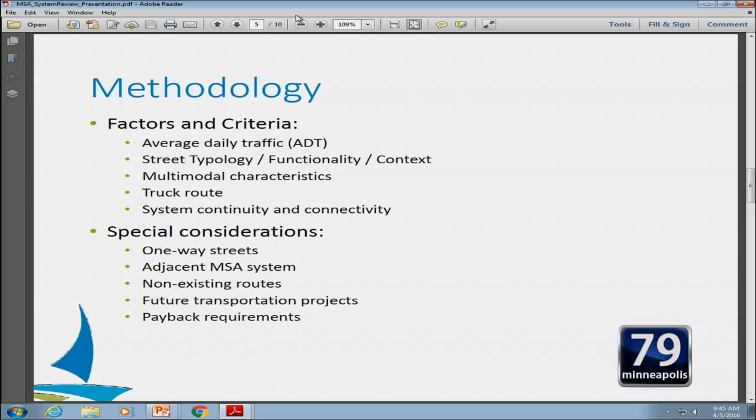Other special considerations taken into account were one-way streets, the adjacent MSA systems of adjacent cities such as St. Louis Park, Robbinsdale, and St. Anthony, non-existing routes currently on our state aid system, and future transportation projects.

Additionally, payback requirements were considered, such that if we have used MSA funds recently on an MSA project, we were not required to incur additional funds to remove it from our state aid system—because removing something we'd recently used funds on would incur a cost. So we wanted to take that into consideration as well.

So I color-coded what the assessment entailed. It's more along the lines of a four-tiered system: is there very good alignment with our current method, the factors and criteria laid forth, good alignment, fair alignment, or poor alignment.

What this took into consideration, as previously mentioned, was primarily the average daily traffic volumes, the functionality of the street, referred to as street typology, the location within the city, and the connectivity to other routes, making sure all the termini of the streets were extended to the nearest adjacent system.

So making sure we align, we really want to tie this to the existing functionality of our street system. Access Minneapolis defines a number of street typologies, and I color-coded these to tie in with how well they align with our system, tying the functionality of the street towards our recommendations, making sure that anything on the state aid system aligns with the functionality and characteristics of a state aid street, such that our commuter, commerce, activity, and community connector streets that serve higher purposes are very strong candidates to remain on the system, or if they're not on the system, let's look to get them on.

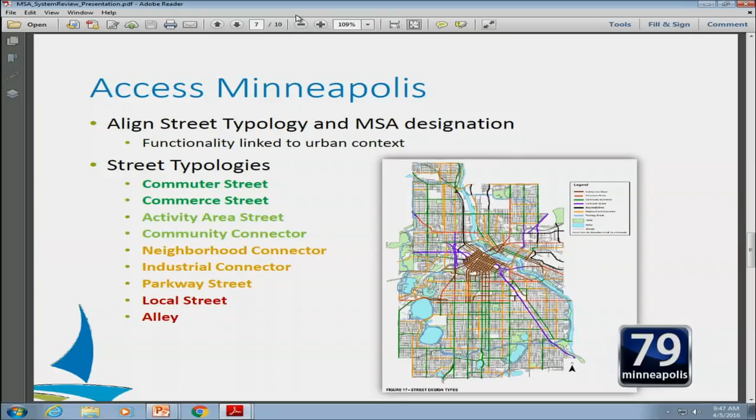And then when you see the orange to red routes, those are more of the routes that don't serve a great functionality of serving traffic or connecting major points of interest. Those were either, if they were on the state system, looked to be removed so that we could come up with a number of recommendations.

So as far as the recommendations we brought forth, we looked at a number of factors and criteria. One of the main points I want to bring forth is, out of the 206 miles of municipal state aid system routes we have, roughly about 85% of those routes are already aligning with a lot of the factors and criteria mentioned. So it left a very small subset of routes that were looked at for removals from the current system.

So what we want to do is set up a framework to implement these changes over 5 years, as I had mentioned. So today we brought forth our near-term recommendations, which is approximately 3.5 miles coming off and going on. So there's an equal swap.

And in order, when we bring forth these recommendations, we have a cap of 20% of our system, as I mentioned, which is 206 miles. So we had to balance both the additions to and removals from the system.

So what we wanted to focus on today, or on our initial near-term recommendations, is with our additions, we want to add routes that already are serving and providing mobility for higher ADTs and align with the factors and criteria such that they serve a higher functionality, and then remove routes that have lower traffic volumes and aren't serving the higher uses as defined by this analysis.

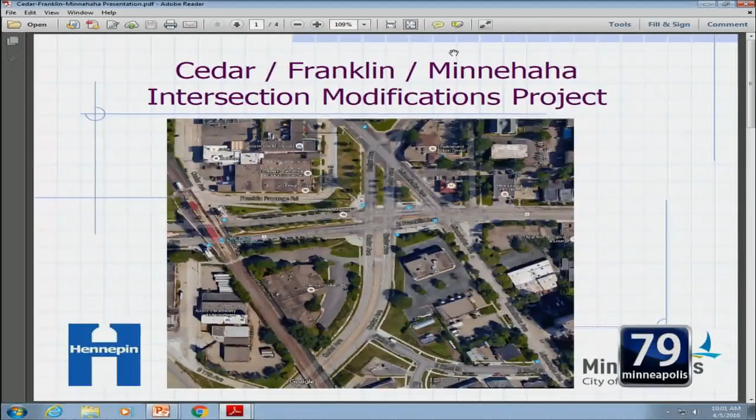A couple of years ago, the Pedestrian Advisory Committee brought this forward as a priority. It's been a priority for the bike group as well. From the vehicle standpoint, it's also been a problem, primarily due to some visibility problems and just a busy area with a lot of traffic trying to go through. So it's confusing to motorists - there are some strange things with nearby highway ramps, but it's not obvious as to what lanes you should be in and how you should get there.

But there's some really good things going on. Some improvements have been done - the county and the city have been working along the Franklin Avenue corridor for a number of years trying to get the bikeways added. To the east of this area, we've got them pretty much all the way to the Mississippi River now along Franklin Avenue.

The city has a project this summer east of Riverside to the river where they're going to convert to what's called a protected bike lane to improve safety even further. The county is also rebuilding the Franklin Avenue Bridge across the Mississippi, and we're adding a protected bikeway system as part of that. So we're working our way down the corridor, and this is one more element from the bike standpoint that goes hand in hand with that.

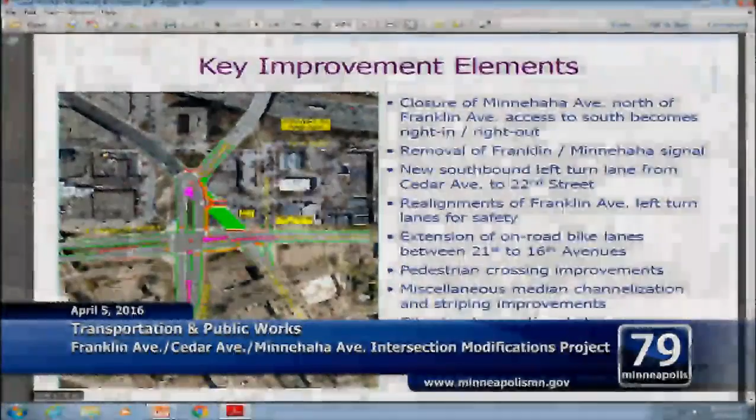So here on 20th Avenue, which right now is one-way northbound, we're talking about modifying that to two-way to allow two-way directions, and the same thing here with 9th Street.

And the reasons behind that is actually to try to mitigate some of what we're doing that's going to affect those local property owners right there in that northeast quadrant.

Taco Bell, for instance—this is a fairly significant change for access to that property. And Resources, Inc., who's just to the north of Taco Bell, is also going to have some impact on how they get to their property.

So by providing a two-way 20th, we thought that would help mitigate that somewhat.

But that pink line in the center there across—I'm going to keep switching here—but across Minnehaha, this is a serious change. It eliminates the ability to turn left off Franklin to go south on Minnehaha, and it also eliminates the ability to come north on Minnehaha and turn left.

So that changes some of these travel patterns and makes some of them more circuitous. They're not major movements today—they're fairly small movements—but nonetheless it will affect some things.

So we had to talk with the fire station because it affects them—their emergency vehicles coming in and out—as well as, like I say, the local property owners.

So I think that pretty much summarizes the elements we're talking about here today. I guess if there are any questions, or Alan, if I missed anything.

Which calls attention to a concern I have, because Augsburg College is right up there, so that's where people will go to get there. It's also the major bike path that gets you into the University of Minnesota campus. It's a significant connection we've built. A lot of bikers and pedestrians getting to Augsburg and the university, or coming from there, want to avoid this horrendous intersection. So they'll take this path and go down to 20th and 9th. The two-way will allow some flexibility there.

But then when you get to Franklin, if you're a pedestrian or a biker, the way it's shown on this, it looks like there's a pink median - it probably won't be pink when it's built, that would be fun though - there's a median there that says bikers and pedestrians shouldn't cross there, we don't want you to cross there. If you're a pedestrian and you get there, it would seem pretty ridiculously far away to get to a light to actually make a crossing. So I'm pretty sure if it was me and a lot of other people, we'd cross there anyway.

There's also 2 lanes of traffic coming in one direction and then 1 lane and a bike path in the other. I also think a lot of bikers will decide they're just going to work their way over or around that too. Have we thought about that? And would there be any way to make it safer and easier for bikes and pedestrians? Well, we also don't want to have cars and trucks using it.

Mr. Chair, Councilmember Gordon, yes, all of those things you mentioned, there's been a lot of discussion, there's a lot of ideas.

I'll quickly mention a couple of things that may help this situation, maybe in the next year or two, depending on how opportunities go. Let's see, starting on 20th, maybe on my little cursor here.

So the city is coming through in a couple years, building a protected bikeway down 20th. It's not known right now how that's going to be configured, but it looks like there might be a possibility of connecting here at this cow path. In other words, we may have an option here of trying to emphasize or facilitate this north-south movement that you're talking about, that people are going to want to go anyways.

There's a redevelopment of the old Blue Nile site that's being discussed. As part of that, we've talked about whether decisions can be made with the city and the property owner to try to leave some ability for us to widen that median, pull the property line down a little bit, widen that median on Franklin to provide a two-stage crossing, refuge island kind of design that would allow this connection from Minnehaha across Franklin up 20th to connect to that protected bikeway.

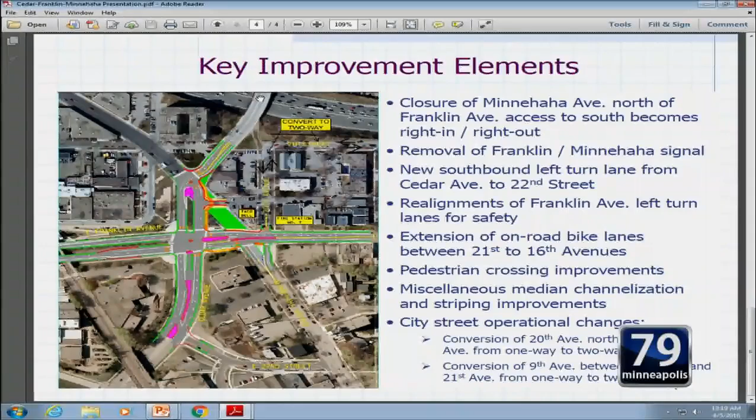I think part of your question also had to do with Taco Bell as an adjoining landowner. We've had numerous conversations — we've actually been to their corporate headquarters and the local franchisee a number of times to keep them abreast of this project and keep them in tune with what's happening. I'll just tell you this: at least at this time, they've expressed no particular desire to be involved with that property or to look at development or anything like that.

We've just kept them in the loop in terms of what's happening and fully understand there'll be continued discussions about the use and function of that property and how it's maintained into the future. In the short term, it will simply be green space like grass, and potentially in the future we'll be able to look at other opportunities.

Correct. One small detail I'll point out: as part of the design plans, that area will remain fully lit and sidewalks that are adjacent will remain in place, so people will still be able to access through there. We're going to change the light pattern a bit so we can get at them and maintain them, but it'll remain a lit area. It just won't be kind of an abandoned piece there.

I think that's very helpful information. I strongly favor this incremental approach. I do think it seems like a little challenging space to have just an open green space in the long term, so hopefully we can continue to work with CPED and others to look for resources to make it something really great for the community, whether that be a more active green space or something that incorporates development.

Yeah, one more comment I'll bring up. At one of our neighborhood meetings we had a brainstorming session, more than a little bit. We had a whiteboard and ideas were listed and recorded, and they span the gamut in terms of uses, activities, or options for there. So we know we're kind of at square one in terms of what those plans might be.

Thank you. Any further questions or comments? Seeing none, again I commend the work we have before us. I think we have a great framework for additional work moving forward, as has been suggested by other council members, and look forward to that work. Hopefully we can keep the partners at the table with their energy and insights. We don't want this big push and then everything to kind of wither away. So let's keep on track with that.

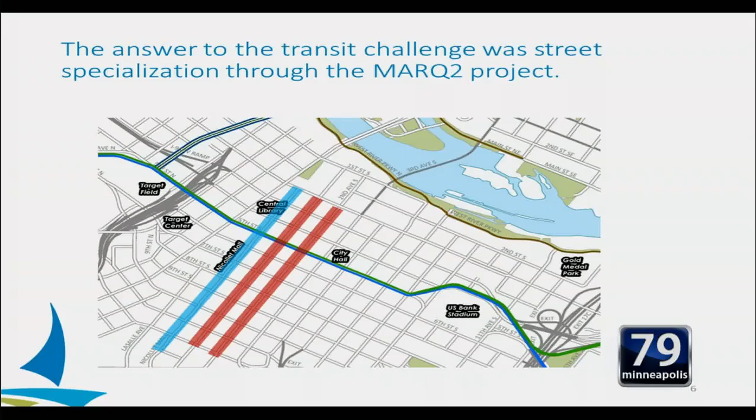And there's good news — that change worked. There were a number of benefits we've already seen, including the fact that local buses are now separated from express buses. That reduces congestion, and on other parallel streets there's been a benefit as well. On Nicollet Mall, we've seen a 40% reduction in bus traffic. That has allowed us to put in place the redesign of Nicollet Mall you'll see this year.

Also, when you concentrate routes downtown, you can provide better amenities at fewer transit shelters at a lower cost — real-time displays, heaters, that kind of thing. Fourth, bus speeds are more predictable and faster, and bus capacity downtown has tripled. Unlike 10 years ago, downtown Minneapolis is now ready for BRT.

Now, there were a few other things that resulted from the change as well. First, because of the concentration of buses on MARQ2, we were able to fulfill what was a long-standing desire from both the city and downtown businesses, and we converted both Hennepin and First Avenues into two-way streets. We also added a bike facility on First Avenue, which, as I'm sure you're aware, is hard to describe as good news. This wasn't something the cycling community or the businesses on the street particularly liked.

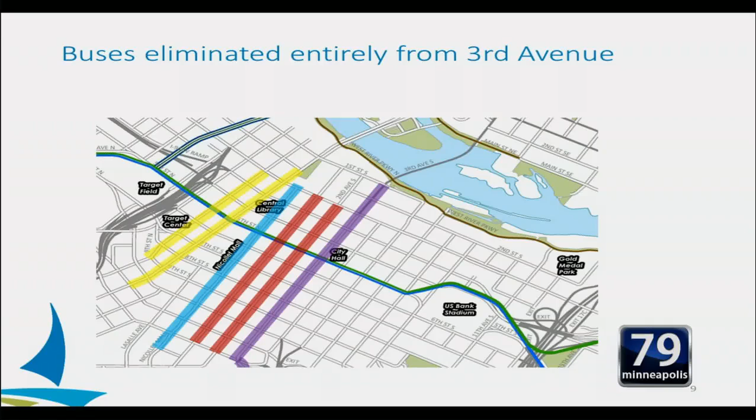But with all the benefit comes a cost, and it has to do with bike lanes. When the design for MARQ2 was adopted, the bicycling community was understandably very unhappy that these bike lanes were removed without identification of an alternative. We've been looking for a replacement to those facilities ever since.

Corridors we looked at included a two-way facility on 3rd Avenue, a two-way facility on Nicollet Mall, and even returning one-way lanes to both Marquette and 2nd. That turned out not to be feasible.

Through the redesign of Nicollet Mall, the city chose not to add dedicated lanes as part of that redesign, rightfully prioritizing pedestrian space on the mall. As part of that process, Mayor Hodges said at the time and since that with that decision comes the requirement that we find an alternative north-south protected route downtown. So she asked Public Works to identify a route and make a recommendation, and that is what you'll see today with the redesign of 3rd Avenue.

So before we get into the redesign of 3rd Avenue, I want to take a moment to talk about how we arrived at that as the preferred route. And in doing that, I'd like to talk about 4th and 5th Avenues for a moment.

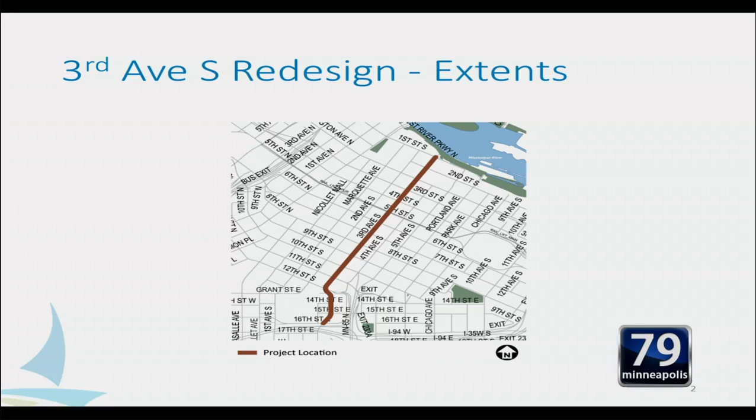The project includes a variety of right-of-way ownership, including MnDOT highway right-of-way, Hennepin County right-of-way, and is primarily a City of Minneapolis designated state aid route. The roadway is generally configured in a 5-lane configuration with alternating blocks of center left turn lanes or a center planted median. A variety of curb uses is also present on the corridor. The roadway was recently reconstructed in 2004 and is in good condition and good pavement condition.

Showing an example of the existing configuration that's out there today. You can see the center green median, two drive lanes. We don't show any of the curb uses on this block, between what I believe is 6th to 7th, but it does show the right-of-way extents and the number of trees located already on the corridor. On the alternating blocks, where it does not have the median, this is replaced with a dedicated left turn lane.

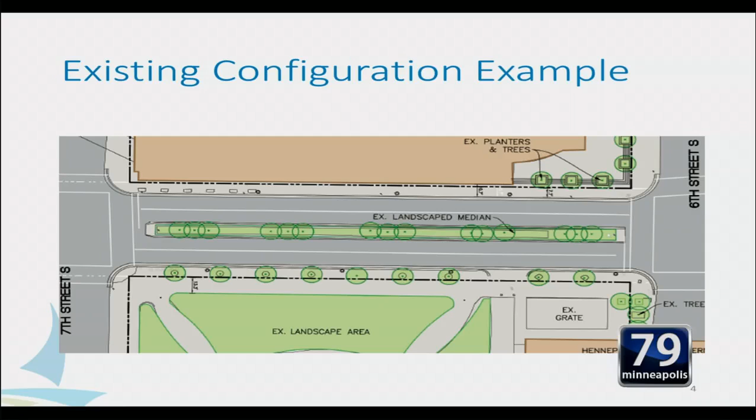The corridor supports a variety of different modal uses. From the 2014 counts of vehicle traffic, it ranges from the mid 6,000s at the convention center to almost 12,000 vehicles per day north of Washington Avenue. It also supports approximately 4,400 pedestrians a day, as well as a relatively high bike count of 850 bikes per day.

The bike facility is identified in the protected bikeway update to the bicycle master plan. The corridor was selected as a primary north-south corridor for bike traffic as part of the coordination of a variety of specialized modal corridors in the transportation system in the downtown core.

As part of the stakeholder engagement, other goals were also identified: to improve pedestrian space by adding greening areas, maintain existing greening space as much as possible, and, as we had more conversation, mitigate and minimize the impacts to vehicle commercial traffic for ingress and egress to the buildings, for deliveries, and a variety of other needs to the properties along the corridor. These were all identified through the engagement process.

The project development, as indicated by the director, started in April 2015 with study and evaluation, initiating a 4-lane configuration. We developed more of an alternatives analysis—what other concerns, what other things can we do, what other options are out there—and adding greening into a 3-lane configuration south of 8th Street, due to the volume considerations of the vehicle traffic along that corridor. We were able to come out with a different configuration that was viable, workable, and addressed a lot of the concerns that had been raised up to that point.

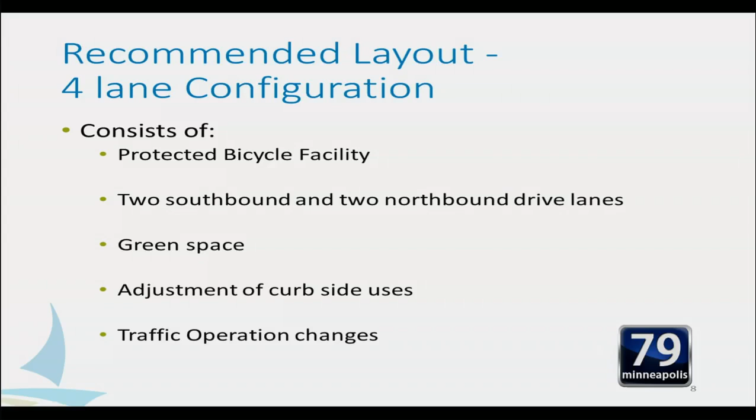We have a few curbside uses that will be adjusted, including removal of parking in locations that are in direct conflict with the bike and travel lanes. We're developing or working with Metro Transit for some new bus stops on 3rd Avenue north of Washington and the existing drop-off bays.

As an example of the operational changes that we're incorporating, we are proposing a signal system that would be upgraded to a video vehicle detection system for the purpose of timing the left turn arrows.

What I'd like to do is walk through the layout in brief. I want to emphasize some of the more contextual elements, how it separates and goes through - generally in 2-block increments that I'm showing here. I'm going to start at the river and head down towards 94.

The first section here I'm showing is the MnDOT right-of-way. We are proposing to remove the parking and adding the buffer bike lanes as is consistent throughout the corridor. We have a couple of additional bus stops, one in front of the federal building, and one in front of the new development, which is adding a bus stop shelter as part of that construction effort.

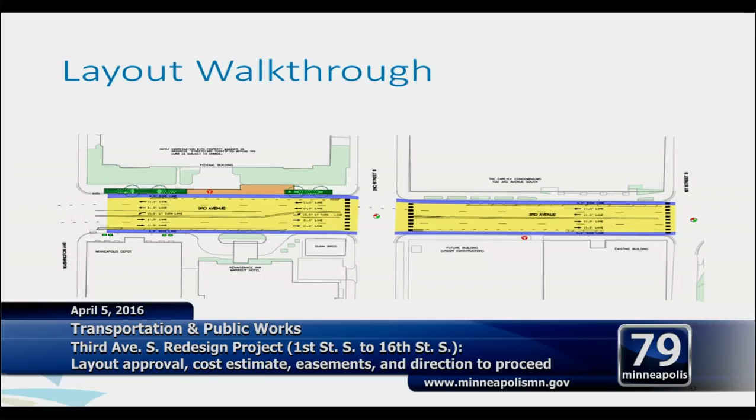Another element I want to quickly point out is what I call zebra striping - you don't see this on a lot of city streets yet. The zebra striping, you see it with MnDOT as well right through here, but they're a bit different, a little wider for the city's portion of it, and definitely frame up that pedestrian corridor through the intersection. This is a new city element. We're working on developing this protocol, so some elements may change, but we're anticipating implementing it on this project.

This is also an interesting portion from an engineering perspective, but also just as a person walking through this corridor - this one has a lot of primary points of access to downtown. You have vehicle traffic on north-south, but also mass transit, and a lot of pedestrians coming through right off of the mass transit, plus high use from City Hall and the Hennepin Government Center. You have a highly developed corridor, US Bank Plaza, which is a good entry point into the Skyway system, and a lot of bikes that use this corridor in this area. So this was a primary evaluation point to make sure we're not bottlenecking the entire corridor and what mitigations we could do to improve it.

We're also working with US Bank Plaza to incorporate some green space. This drop-off bay configuration is still under evaluation and consideration and coordination with that property owner, so it's expected to change. But we're pretty confident that we'll get some green elements to that corridor at that location. We're also showing some green space improvements and a wider pedestrian ramp at the corner of 4th Street South and 3rd Avenue South, next to the City Hall block.

Sixth to 7th, this is pretty much the end of what I'll term the north side of things, where south of this point you start getting lower vehicle traffic and start seeing 10-foot drive lanes. We still have 10.8-foot drive lanes through here. We also worked closely with Hennepin County, and they were able to get some more green space, actual planting space instead of just a grate.

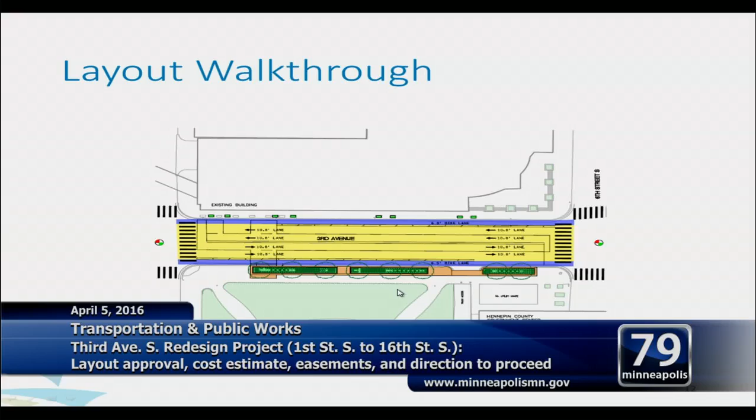As I mentioned, this switches to the 10-foot drive lanes. This is where the volumes of vehicles traveling through the corridor fall below the criteria threshold we see for a multimodal corridor, so we're able to do a 10-foot drive lane. We still have the bike facility.

Did I not move this one? There we go.

Still have the bike facilities, still see the drive lanes coming through the corridor. You don't see a lot of additional green space. A lot of the green space we're able to find is very dependent on maintaining the 8-foot clear zone that we want for the downtown environment. There's a lot of utilities and operations on the corridor, not so much at this location, but utilities are present. There's also areaways and underground parking garages that we're addressing and coordinating with to see where green space is practical.

Question from Councilmember Bender: Thank you, Mr. Chair. Mr. Engelman, before you move on to this next part, could you go back through this northern section and talk about why the original determination was made that 3 lanes are not feasible here? What were the trade-offs with vehicle travel delays, and how did you determine those were unacceptable from a staff perspective?

Thank you for the question. Committee Chair, Councilmember Bender, that's a mouthful — that's a lot of conversation and design detail. We went through a number of analyses. The simplistic answer, without getting into the weeds of design details, is the vehicle traffic volumes. What would happen if you went down to a 3-lane configuration? How would that impact the neighboring cross streets, the intersections for vehicles and pedestrians coming through, and a variety of things? So it's an integrated review to make sure our network stays mobile and workable. Of course, these design details matter a lot to the people using the roadway, so I think these are important points, even though they're rather detailed.

Did you use a level of service determination to identify which intersections were not appropriate for a 3-lane configuration, or were you looking at traffic volumes? Were you looking at minutes of delay? How did this traffic analysis determine that 3 lanes was not appropriate for the northern section?

Director Elwood: Good morning, Mr. Chair, Councilmember Bender. I'm Don Elwood, Director of Transportation Engineering Design for Minneapolis Public Works. You're asking a very good question about the engineering details of delay at intersections, specifically on the corridor of 3rd.

I want to reiterate, Public Works can make both options work — we've stated that earlier. We can make the 3-lane section option work, and we can make the 4-lane section option work. When I say we can make it work, there are trade-offs and mitigation that need to be put in place with both options. We're looking at mitigation with left turn arrows that we'll put in place with vehicle detection, and mitigation at the intersection of 5th and 3rd to make things work better.

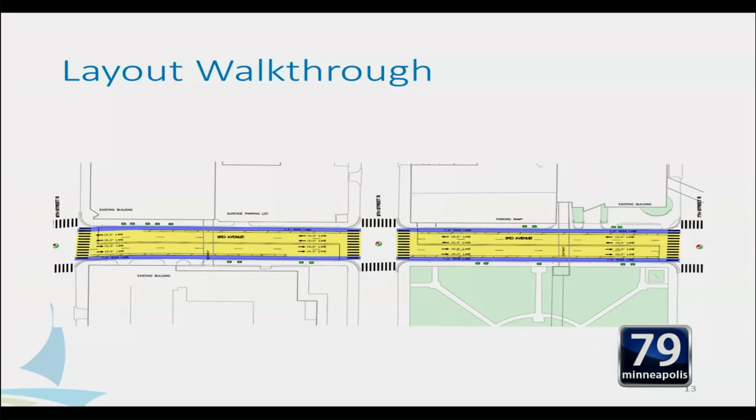This block is pretty straightforward, as are these other ones as well. Some of the benefits are we were able to find some spots on this block that had open utility space, enough space that we could put in a tree or four and have enough root media to substantiate and grow that into the future. We do show a loading bay or drop-off bay at the Ameriprise building as one of the curbside uses that we're intending to maintain.

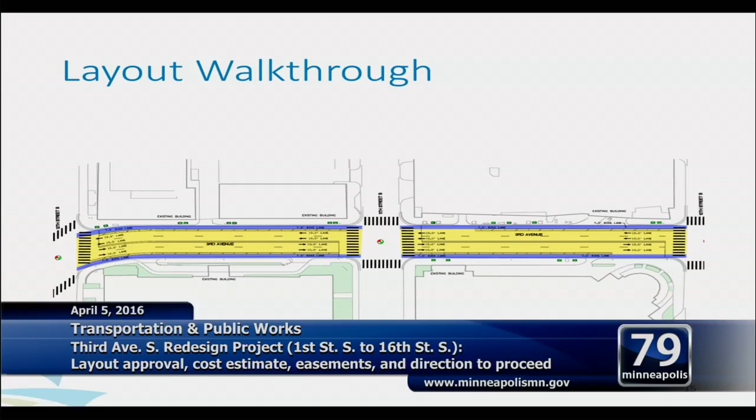The next section, continuing on the south end, we're showing the 4-lane configuration still through. There's not a lot to be added conversation-wise to this section. Then coming around the corner, around the convention center, we're showing 2 lanes to the south and 1 lane to the north.

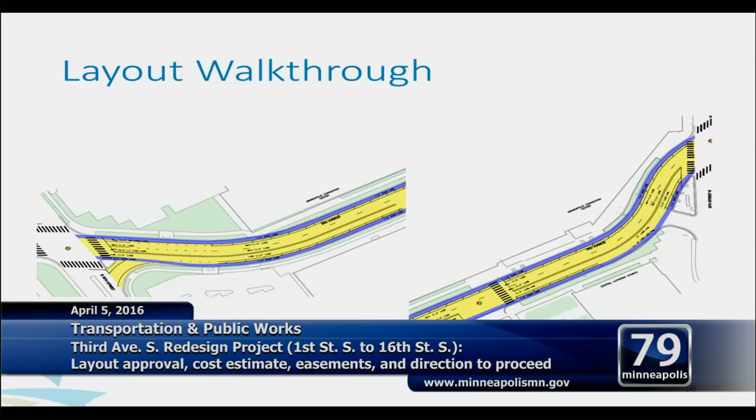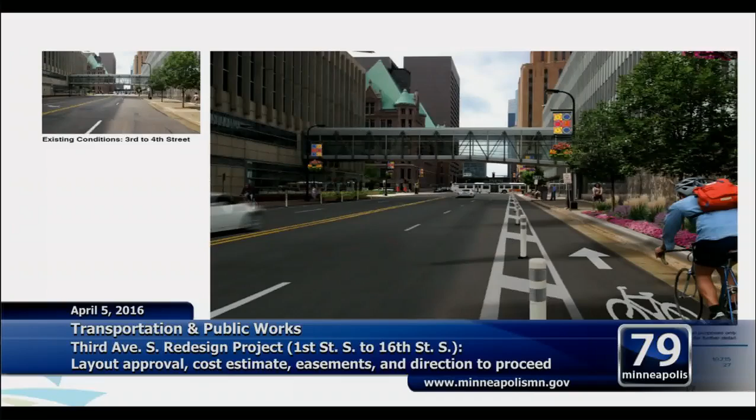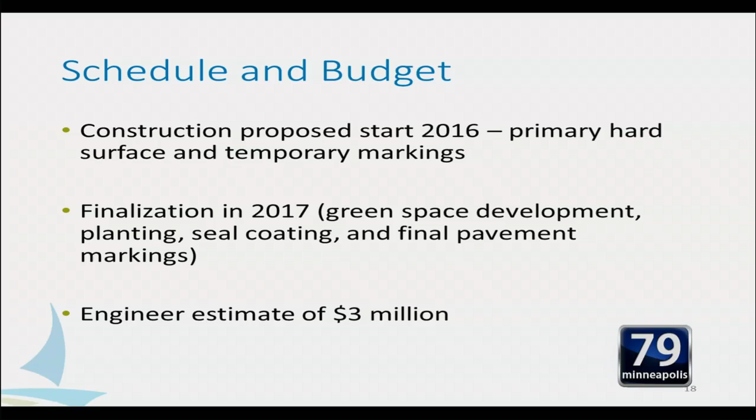The project is on a short timeline. We're wanting to implement this project this year, with a proposed project start in 2016. This would be primarily hard surface pavements, and we want to put in temporary markings to have a bike facility and operating vehicle facility by the end of this year. We anticipate coming back to finalize this project in 2017 due to the coordination and efforts of the plantings, making sure any green space would have an irrigation system as needed. It would also allow us to have seal coating during our more typical July timeframe, and then have the final durable pavement markings placed at the same time.

Our estimate for the project is $3 million.

In summary, we're excited to move forward with this project. It's provided a great addition to the downtown transportation network and improvement to the corridor, hitting on a lot of the points Brandon brought before. This is a necessary north-south connection. We have a lot of bicyclists using the corridor, and we want to get that facility out there for them to work. It augments the multimodal nature of our downtown environment, and working with the DID property owners and property managers to provide additional green space improvements to the pedestrian environment, we'll go further along that path to make it a good central core business corridor. The neighborhood properties and advisory groups and other stakeholders were very helpful in identifying the concerns and elements that would make this project a success. The communication path will be maintained and continued as we move forward, and we'll have to close the loop in communication about this short timeline and engagement. But the engagement has not stopped; we will be continuing to have the conversations. We're excited to see a finished corridor as an example of the mixing of many modal choices that you have from the downtown Minneapolis environment. Thank you for your time.

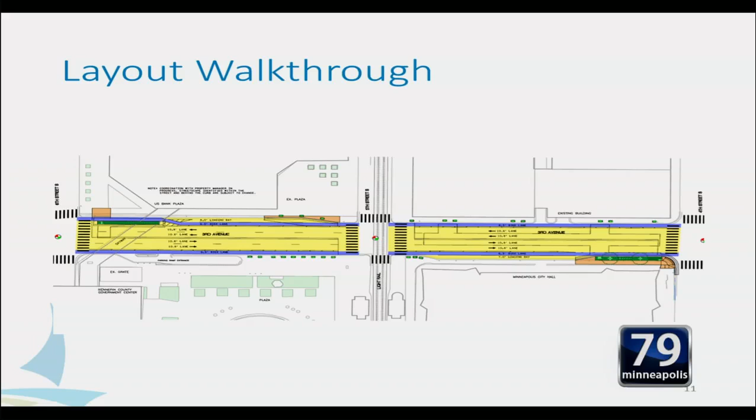The other important aspect of this side of our building is about pedestrian improvements. It's a major thoroughfare, and the Pedestrian Advisory Committee expressed significant concerns about it, which I think is very warranted. Mr. Engelmann, would you say this is improved from a pedestrian standpoint, and can you assure me that while we've reduced the number of vehicles that can be parked here, it's understood that this is still for police as they need to access it?

This is the area of the building you're talking about, just the lower right part of this slide that you have up. Mr. Chair, if perhaps I could answer that.

In the pedestrian advisory resolution, they indicated their concerns with the sidewalk adjacent to us along 3rd between 4th and 5th. We are in total agreement that sidewalk is inadequate on both sides of City Hall and needs to be addressed. This project is not going to resolve that issue, but we will continue to look at providing a better sidewalk environment there.

There's a couple of issues at hand. One is police department operations, so we need to continue working with them to find alternatives to parking. The other issue is this building has what we refer to as an areaway, so the basement extends out under the sidewalk, and the manner in which the streetlights are tied in makes it a complicated situation. Not that it can't be resolved, it just will take more work operationally and from an engineering perspective. There will be some improvements made with this project, but we are not going to resolve the real issue, which is we need to widen the sidewalk along that corridor. Thank you.

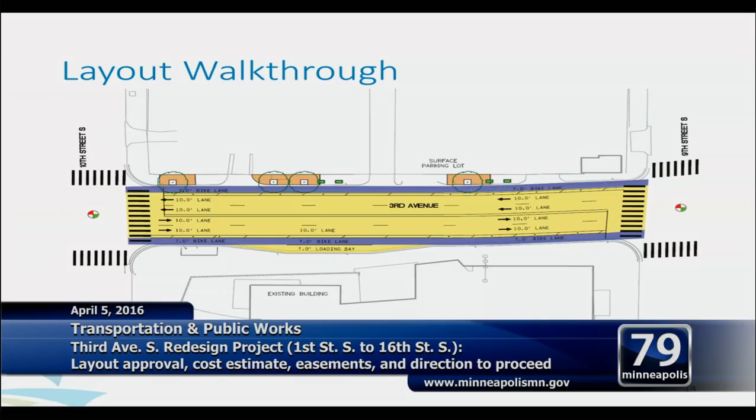And that will not impact the sewer line or cause some kind of huge backup? It sounds like we're not impacting the sewer underneath it. That's the intent, yes. Thank you. That's it.

Councilmember Yang: Thank you, Mr. Chair. I just wanted to point out that I thought I heard you make a motion to forward this item with that recommendation, and then I've heard Councilmember Bender make a motion with regards to what she passed out in front of us. It seems like those two motions are competing, and I'm wondering if we could address one before the other.

We would take the substitute first. My recommendation is to do the motion I made, because it accommodates the time to work out some of these other issues, which are secondary and tertiary components of this project, knowing that in no way is the primary objective in question. So it's more of the issues on the edge.

So with that, I do have several more questions for staff. We didn't get to the southern section, vehicle volumes, service levels, any of that. So I just want to acknowledge that. So you have more questions, okay. Significant. Okay, so Councilmember Glidden, and then Gordon, and then you.

If Councilmember Bender has more questions, I'll let her go, because mine was more in the nature of a comment. We're getting down to the debate between the multiple layouts that have been out there, and I don't know if staff has brought any visual so we can understand the 3-lane design, knowing that staff's recommendation is the 4-lane, which you've presented. So, thank you. Councilmember Gordon?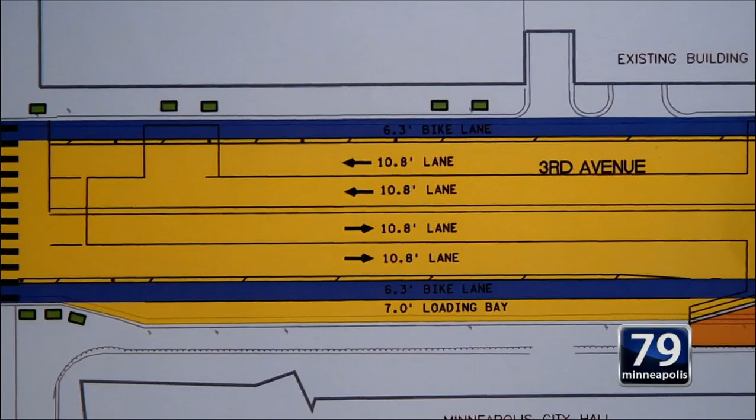Also, I'm interested in having the city lead by example and make sure we have the best pedestrian realm we can around our buildings. If any of us have walked around the building, we know there's a couple of spaces where our sidewalk is very difficult. Over on the 4th Avenue side, it's probably even worse. There's curb cutouts, there's a driveway there, even slanted sidewalks, so it's not a really good alternative. So if you were going to try to walk, the best option would be to come over to the 3rd Avenue side, and I think we have a real opportunity here to improve that pedestrian realm.

So people who are in a wheelchair or handicapped or in a scooter, maybe passing somebody who's dragging along a big suitcase, trying to get up to the station - we want to have a space where they can move comfortably. And I appreciate we're not moving the curbs anywhere. It looks a little bit like we're doing some work with the curb when I look at this and see the brown section and the trees that are added there. So I think it's possible there is some curb work going on.

I appreciate there's some complexity because there's an areaway. I think about cars parking over the areaway, and I think we're trying to move it to have pedestrians walking over the areaway, and bikes, and I don't quite understand all the complexities, but I'm just a council member, not a fully certified engineer who understands how lighting connects to things like that.

So I have a motion that would try to include the layout, constructing the wider unobstructed sidewalks on this full block, continuing the protected bikeway, and removing all the parking, which I think is the resolution I want us to get to. I also think it's a resolution supported by our advisory groups, and I think we heard recently from Mr. Kotke that he supported that resolution. I know there's concerns about the cost and added engineering.

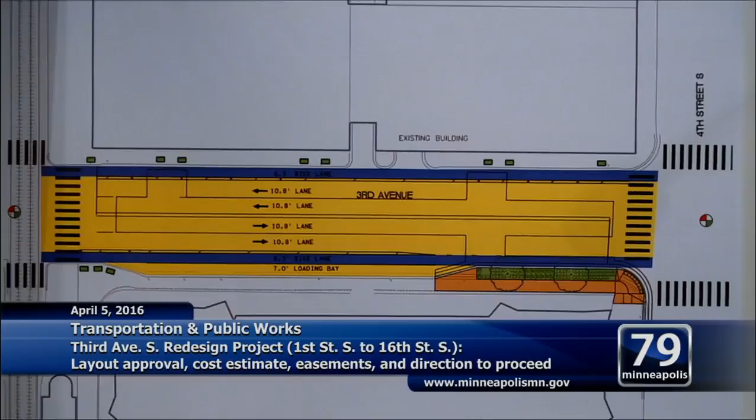It's also hard for me to believe that as part of a $3 million project, we couldn't figure out how to handle that and get that engineering done, or find additional revenue to get it done as part of this project. My fear is, if not now during this project, when would we get to it, and how challenging would that be? I appreciate that we probably have different departments with different goals, and we're stuck in this spot, so the council could weigh in and clarify.

I believe we could work hard and look at 4th Avenue, and look at the other entrance where we have some meters. I think we could be sensitive to the needs of the police department to have their loading bay and replace some parking. For the long term, we've heard from property services that these functions are very likely going to move when we rearrange the campus, so we might not even need the loading bay. That demand might disappear in 2 years.

So I'd like us to work on this. Maybe the motion to amend the layout is too much for the committee at this point, but perhaps a motion to have a staff direction to do everything humanly possible to fit this into the project this year should be done, or something to that effect. So colleagues or committee chair, if you have suggestions for language on how this could be a staff direction instead of amending the proposal, I would be open to that.